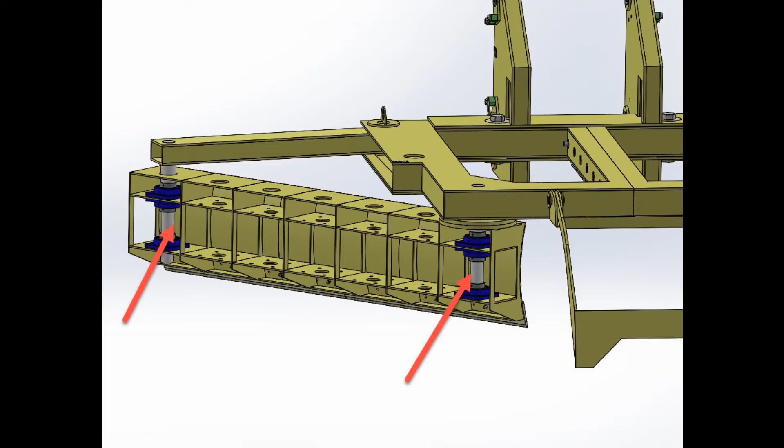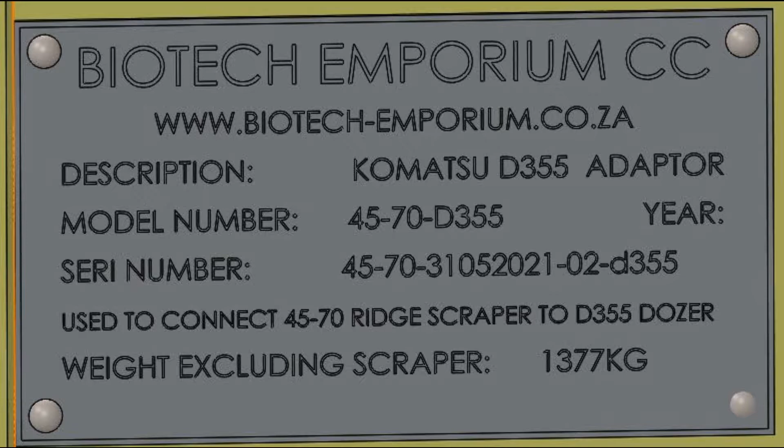The two blades are mounted on hinged pins that allow the user to fold the blades under the frame when moving from one job site to another with the machine attached to the bulldozer. A removable dozer attachment is provided for the specific bulldozer model that will be used with the 45-70 Ridge Scraper. The main ridge scraper can thus be used on different bulldozers in the correct weight class by only replacing the dozer adapter with another dozer adapter for the second machine.

Other dozer implements from Biotech Emporium are also designed to connect directly to the ridge scraper dozer attachment, making it quick and easy to swap implements in the field.

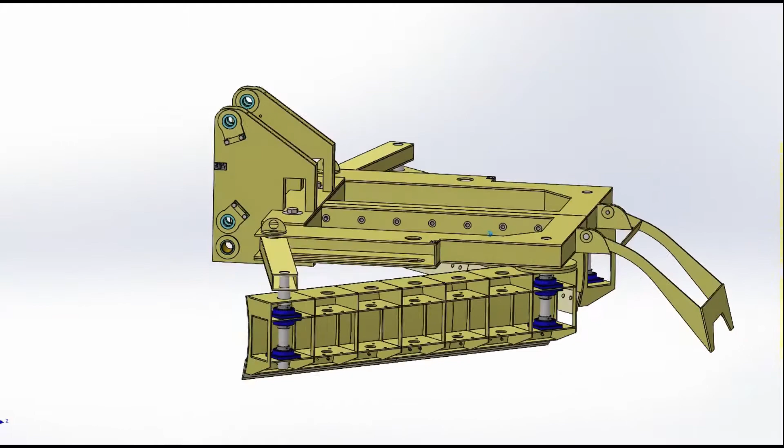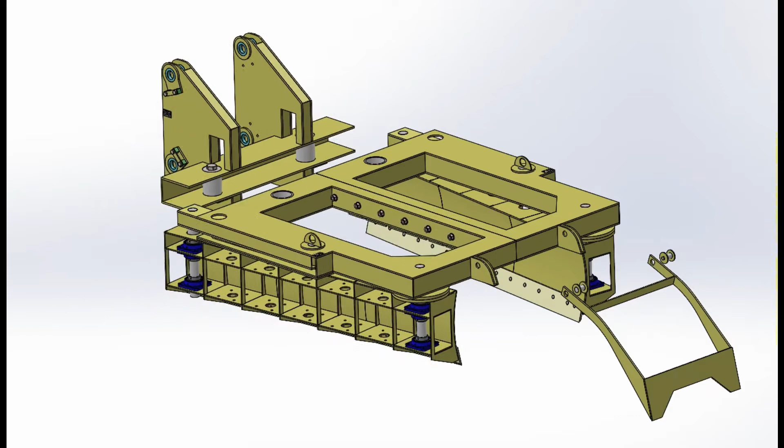Your new 45-70 Ridge Scraper will arrive in 4 pieces. These pieces are the left and right frame assemblies, the rear ridge shaper, and the dozer adapter you ordered with your ridge scraper. To assemble, move the 2 frame sections together and insert the 7 bolts provided. Tighten these bolts securely. Now install the dozer attachment using the 2 large 200 mm pins provided. Lastly, install the rear ridge shaper using the remaining 2 pins.

The ridge scraper can now be hooked onto your bulldozer. Remove the pins locking the blade assemblies in the closed position. Now push the blades outward to open. The swing arms will slide along the frame within the slots provided. When fully open, install the pins in the working position.

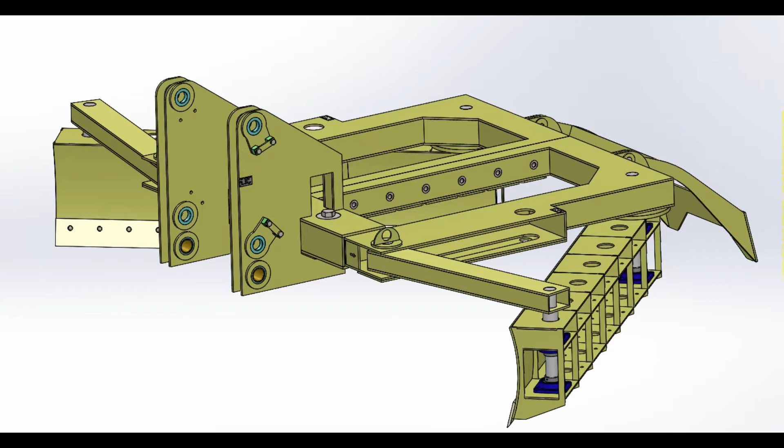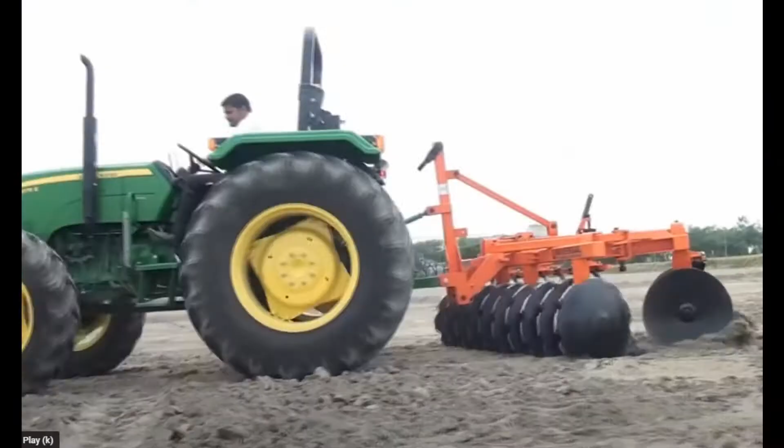It is important to do proper ground preparation before attempting to build planting ridges using the 45-70 Ridge Scraper from Biotech Emporium. Biotech Emporium suggests that you start the ground preparation by ripping the field to a minimum depth of 500 mm. This should then be followed by a disc plow to break up any remaining lumps. Mark the position of the ridges clearly so that the dozer driver will be able to follow the straight lines. The field is now ready for the ridging operation.

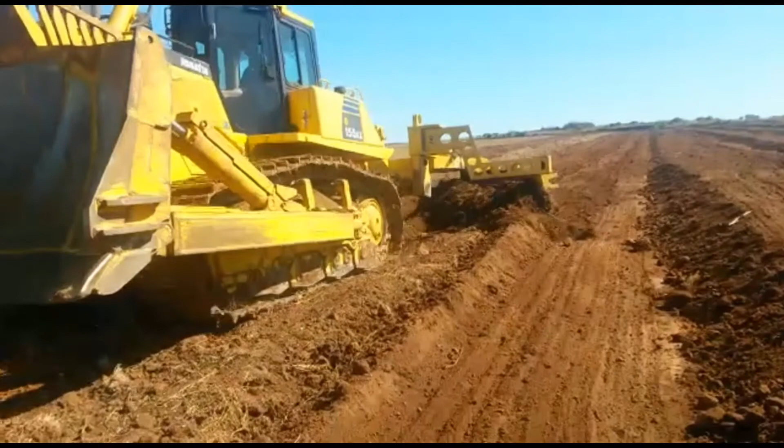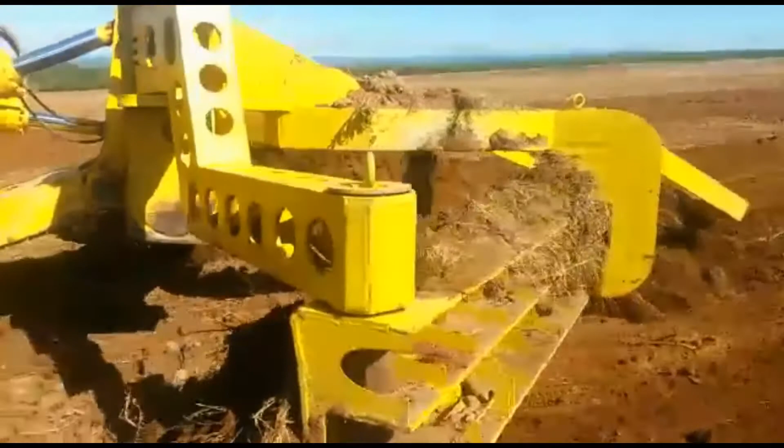Use the 45-70 Ridge Scraper in the following manner. Tilt it slightly backwards so that the front tips of the blades are just off the ground while the rear tips are touching the ground. A tilt angle of about 5 degrees is suggested. This tilt angle will prevent the blades from digging into the ground in the front, thereby causing uneven trenches. It will take a bit of practice, but once the driver is used to the scraper, he will be able to go as fast as the bulldozer's power will allow him to go.

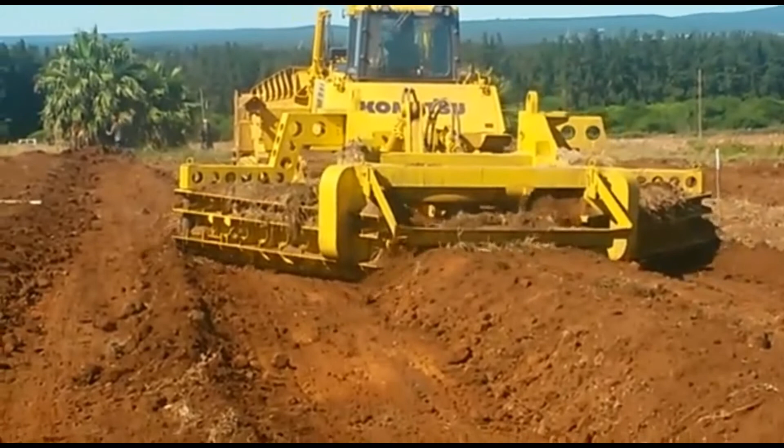The rear ridge shaper can be used in most types of soil, but in very sandy soil it is suggested that you remove the shaper as that will flatten the newly formed ridges. The 45-70 Ridge Scraper should be inspected periodically for worn pins and bushes. It is also suggested that the cutting edges on the blades should be replaced when they become worn to the point where they no longer extend past the blade's mold boards at the bottom, as that will result in worn mold boards that are extremely expensive to replace.

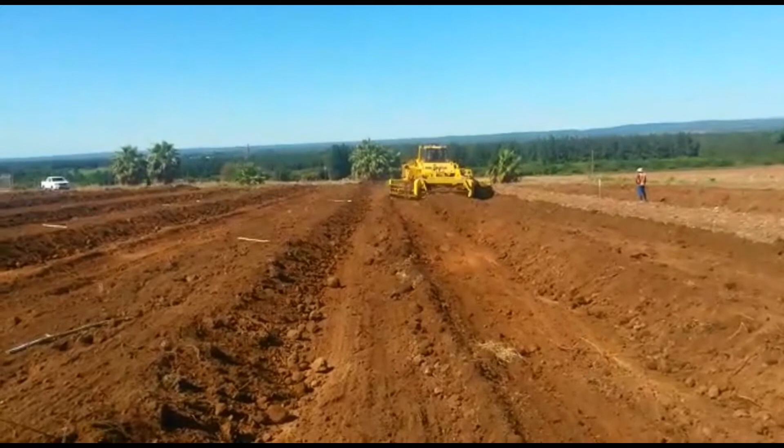The lower brass bushes on the dozer attachment will wear out over time and will thus need periodic replacement. We suggest you use a high-quality grease to lubricate these bushes on a regular basis, as that will extend their life expectancy quite drastically. Should you need any spare parts for your ridge scraper, please provide Biotech Emporium with the model and serial number as shown on the nameplates on each of the frame halves. The nameplate on the dozer attachment is for the dozer attachment only, so should you need spare parts for the dozer attachment, please provide its unique serial number.